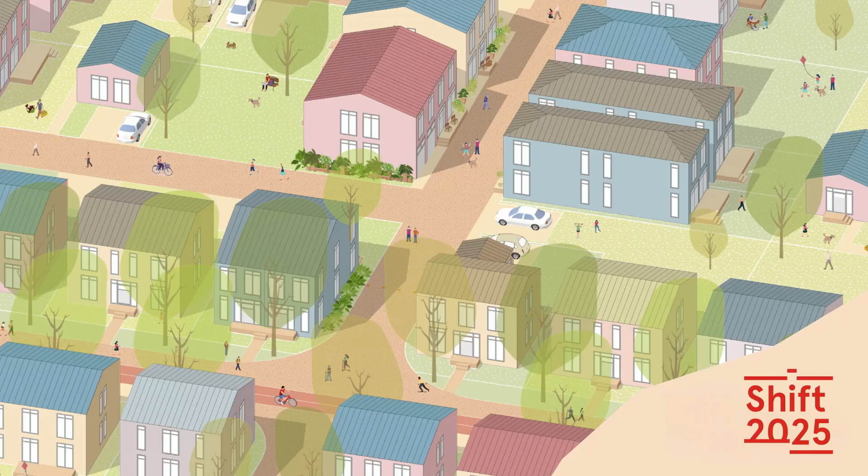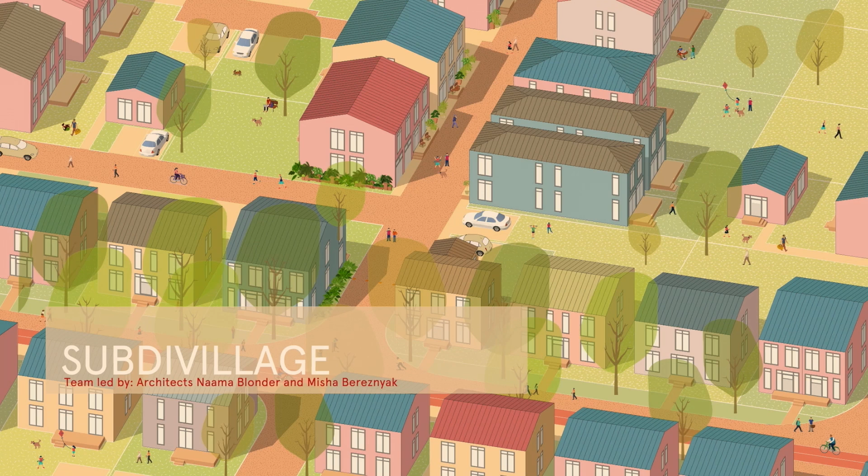So up first, we have Subdivillage by the Smart Density team, led by architects Misha Bereznyak and Naama Blonder. Please join us on stage, Naama. Subdivillage addresses low-density growth by redesigning suburban street networks in order to improve walkability, cycling, and local trips within the realities of low density, car reliance, and limited transit. Without raising costs or density, the concept creates livable communities ready for future transit and growth. Team led by architects Naama Blonder and Misha Bereznyak. Thank you so much.

And this is on? Okay, perfect. And clicker, clicker, clicker. Okay, hi. Thank you so much for having me tonight.

This number, 58%, represents how many single-family houses are built as a percentage among all the new homes we build, almost two-thirds. My company is called Smart Density, and what we advocate for is quite the opposite: much more compact, livable development. I personally live downtown in a condo, don't own a car, bike everywhere. But at some point we realized that people want something else if this is what the stats show. And this is what we build: sprawl, low-rise residential neighborhoods.

Because this is the OAA, we picked some of the best in Ontario, but this is pretty much how it looks like all across North America. And this is how it looks like at the ground. When I talk to people, they say they move to the suburbs because it's kid-friendly and green, which is not so much. Blocked with cars. Cars are very, very dominant.

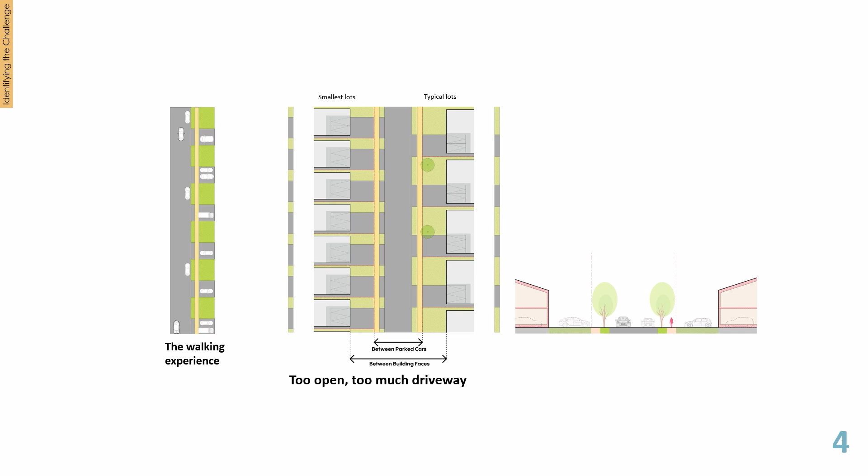And this is how it looks like architecturally. Just look at the street section. Oversized, very, very wide, the walking experience, and even over time, our suburban properties have shrunk because they also need to address density. So the qualities that we had in the original suburbs are no longer delivered in today's suburbs.

And we ask ourselves, can we do better? Because I want to say that even those who like to drive, okay, I don't know how, but some people like to drive, I would say they appreciate walkability. And walkability is this very soft word that architects and urban planners use. And what does it actually mean? So for us, it means that it's pleasant to walk. If you think about it, a lot of our built environments are actually not that pleasant to walk.

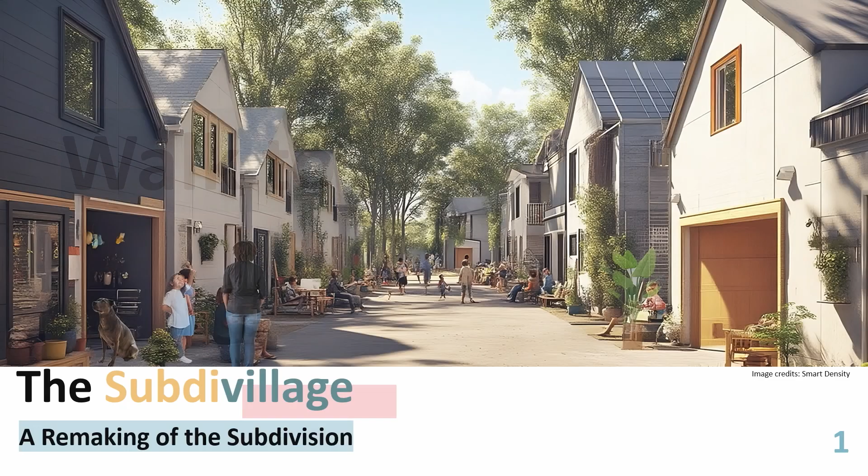With that, we came up with the concept of Subdivillage, that is basically proposing new street typologies. Wait, I'll get to this here.

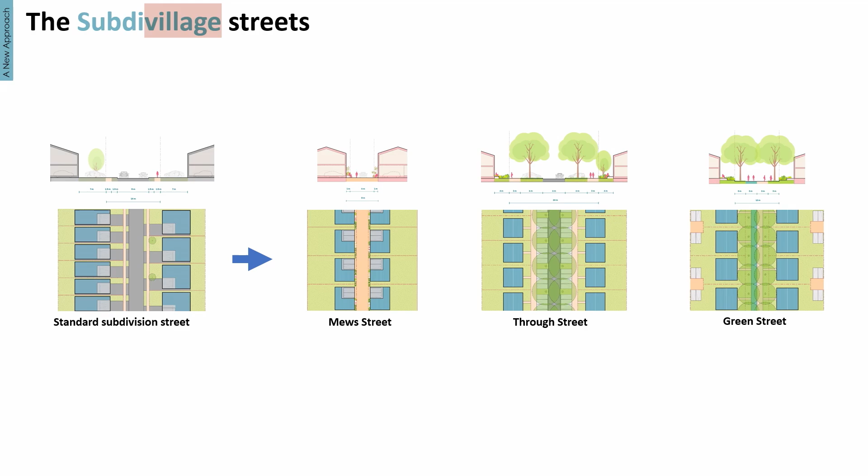We want to offer a menu of new streets. Yes, we will have the regular vehicle street, but we will also have streets that are more car-light or completely car-free in this new neighborhood design. And this is how it would look like. And if you think about it, even what we call the green street doesn't exist in today's suburbs. So can we deliver this new quality?

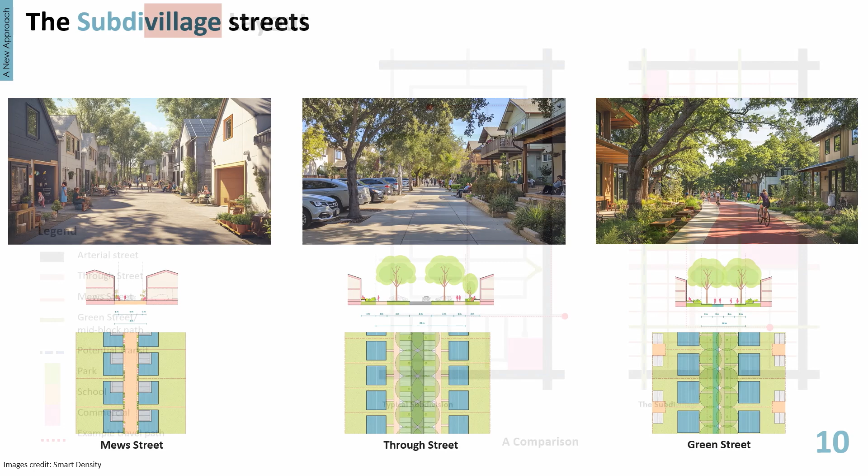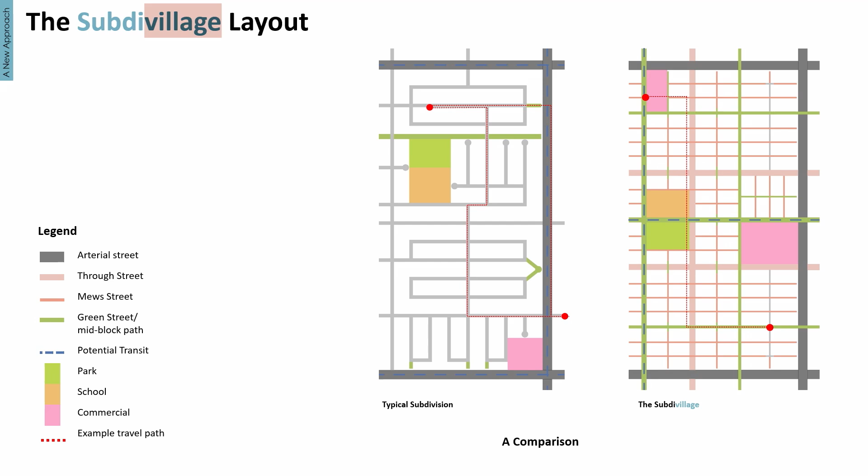Here's a comparison of how our typical suburban layout looks today, and our proposal in comparison, a way more efficient use of land, a simple grid that would utilize a better outcome. Because what we want to see here is that this is not the new urbanism type where you access this street and park your car in the garage, but we believe that design can shape behavior. These streets tell you to slow down. And yes, the streets are also very short, so you don't have to drive very slowly for too long.

So what you would see here, again, the kind of orangey is the Mews street, where it's car-light, and where you can see the little cyclist, it's completely car-free.

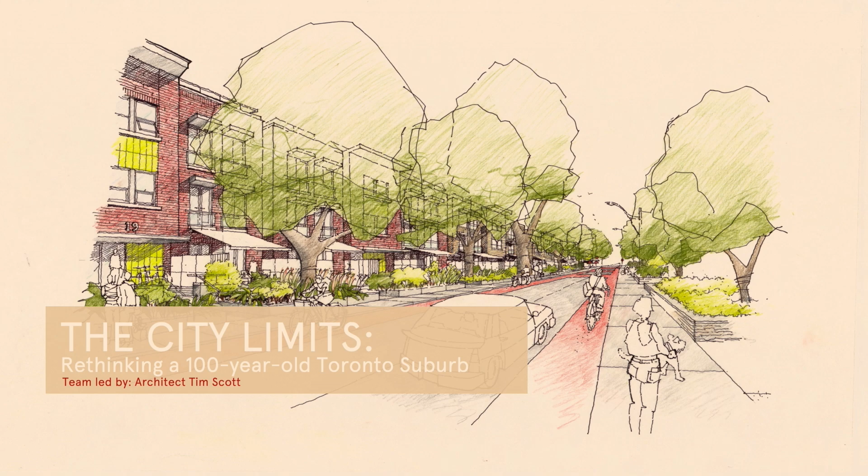The second project is City Limits, rethinking a 100-year-old Toronto suburb, with team lead Tim Scott accepting the award. Please come up, Tim. City Limits, rethinking a 100-year-old Toronto suburb, envisions a sustainable future by integrating climate-focused design, quadrupling residential density, reclaiming streets as public spaces, and creating human-scaled, connected neighborhoods with carbon net zero strategies and cohesive urban living. Team led by architect Tim Scott.

I'm going to read this so that I can blast through it. Thank you, Lara. I stepped back from full-time work in 2022, which has given me time to roam around. But I soon realized I was going to end up on the curb, shaking my fist at the parade of SUVs filling our streets. So I went back inside to do something more constructive.

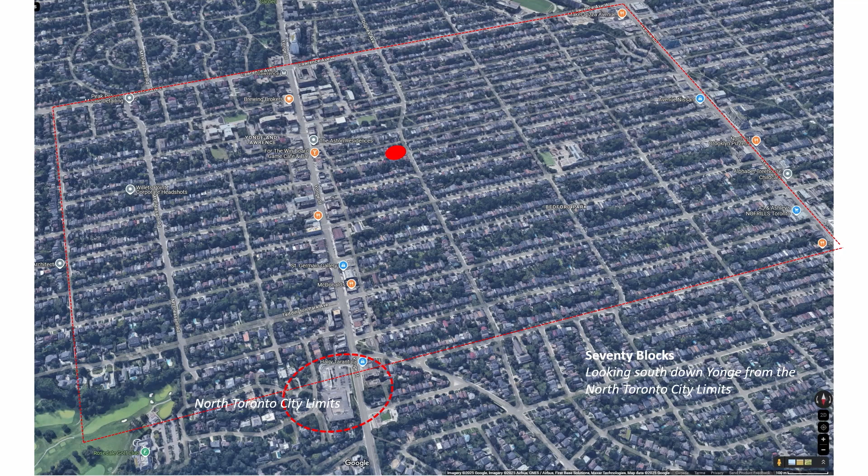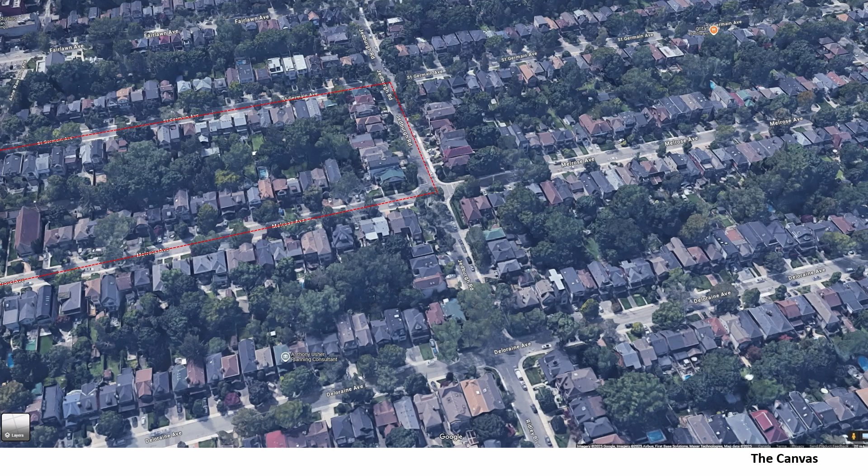Which has been to reimagine what our 100-year-old neighborhood might be like if it were to be a place we'd like to stay. My neighborhood is comprised of 70 nearly identical blocks straddling the primary transit corridor of Yonge Street, between Lawrence to the south and the old North Toronto City Limits site. It's a monoculture of modest single-family homes in single and semi-detached format, typical of many neighborhoods across Toronto and other cities in southern Ontario.

And like all those neighborhoods, it's being rebuilt lot by lot. The new single-family houses are, like the homes they're replacing, all the same, with the exception that they are more than twice the size while accommodating, at most, the same number of people.

This time around, the amenities are all private. The garage has moved to the front of the house, displacing the porch. The front yard landscaping has been largely replaced by paved parking pads. This curious distortion of the status quo is being realized by a development industry who knows its market is fearful of change, unless the change is to make things bigger.

The scale of the new builds, plus the recent changes to the zoning bylaw allowing for laneway suites and 3 and 4 plexes without parking requirements as of right, suits my project perfectly. My objective is to quadruple the residential density within the general form and character of the existing neighborhood for all the pressing reasons: the need for housing, the need for the missing middle, the need for consolidated neighborhoods that are not car dependent.

So I designed a simple 3-story threeplex in single and double lot formats, along with the laneway pavilion, to be comfortably scaled and gracious. Remember, I'm doing all of this to make a place where we'd like to stay.

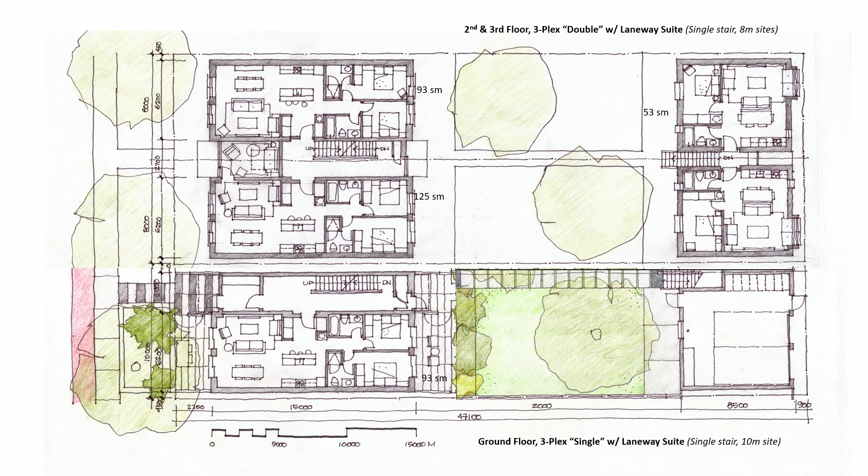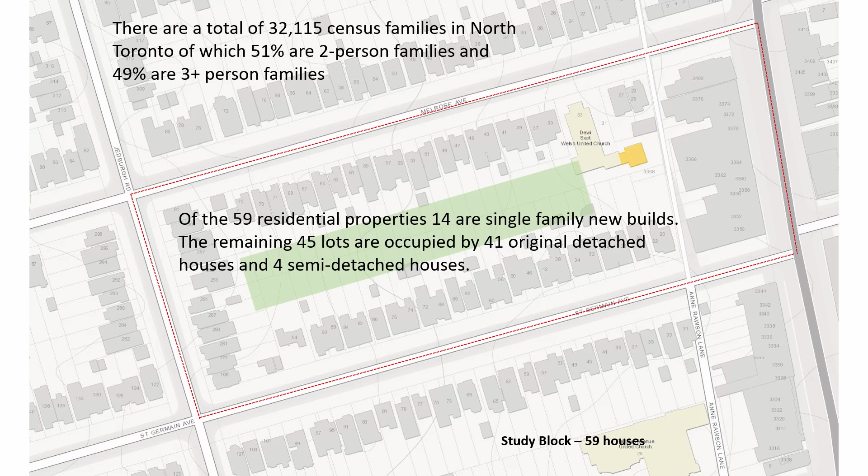Next, I chose a study block with a depth of 100 meters, typical to the neighborhood, providing sufficient room to add an east-west public lane. I replaced several properties with surface parking to accommodate the cars currently parked out on the adjacent streets. Mixed-use development will be allowed in corner lots.

This proposed development will happen organically, lot by lot, in the same way it's currently being rebuilt. As a test, this site plan replaces the 14 existing new builds with 3 and 4 plexes and a number of associated laneway units, increasing the existing 59 homes by 2.5 times.

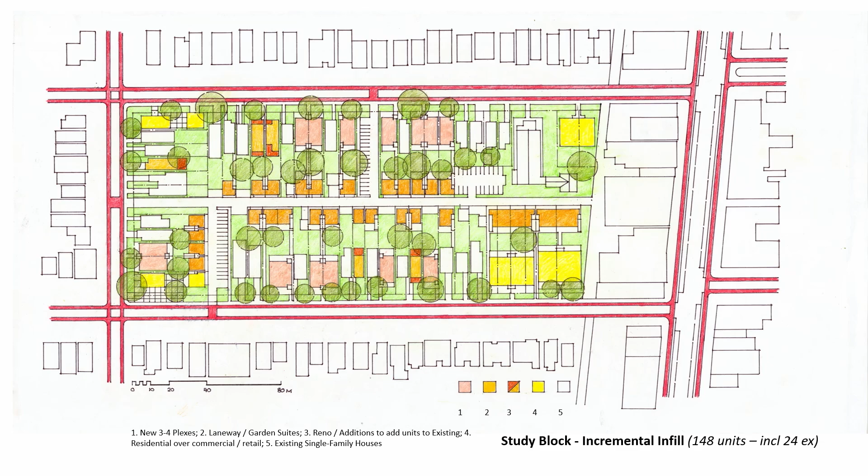And to reiterate, it's of equal importance to me that the streets and front yards are decolonized of cars to allow provision for pedestrian and cycling mobility while reestablishing a landscape streetscape. That's in good part because I also want to live in a human-scaled and civil community.

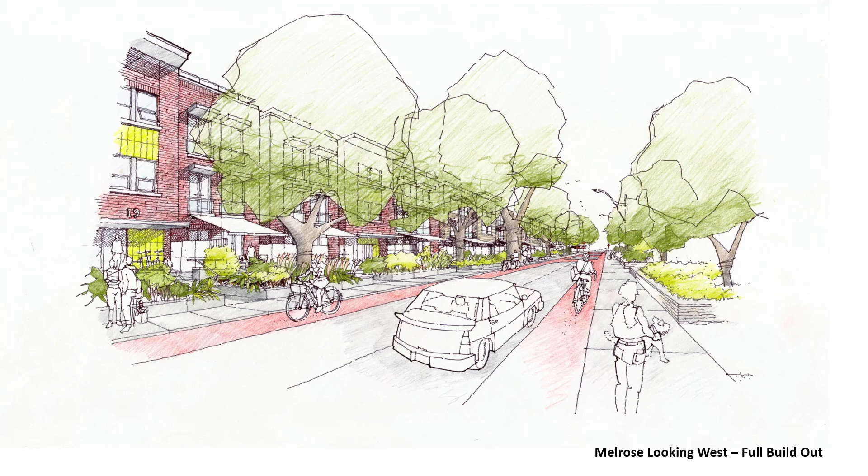I'm not preoccupied by what the new multi-unit residential buildings might look like. I hope lots of architects will be involved. I do care how they're made, which is to be designed to meet carbon net zero emissions and last 200 years. So who's going to take this on, make this happen, or even be interested?

You'll have to look for my full submission to find out how that all works out.

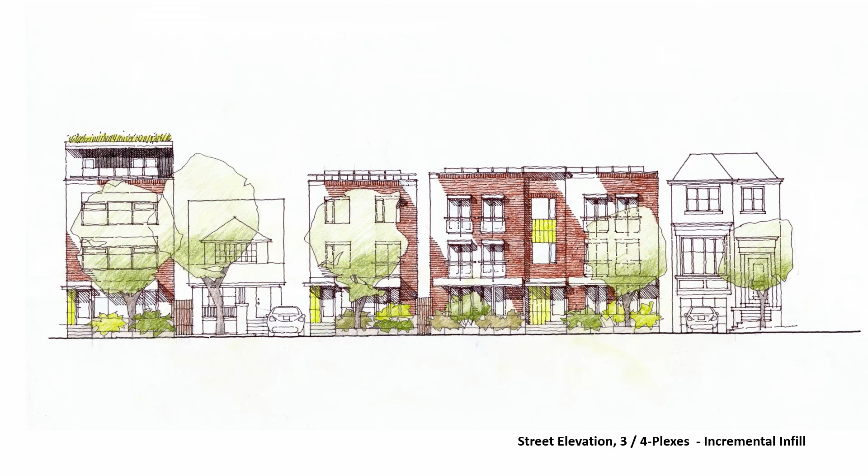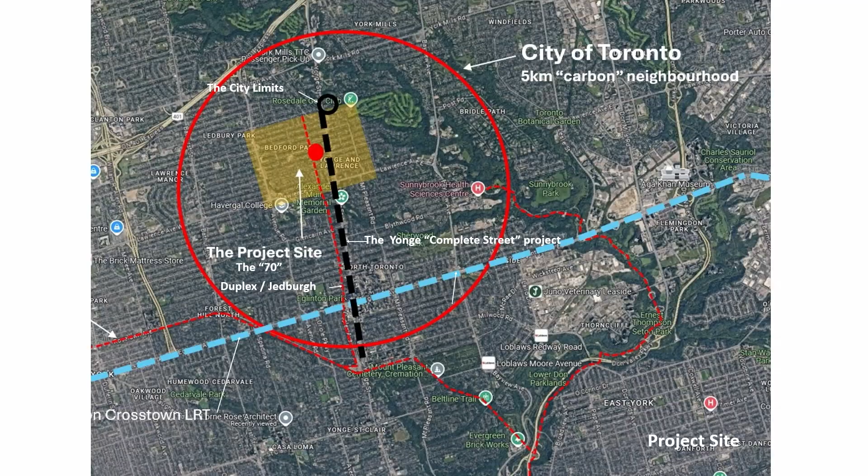I began this project fascinated by the City of Toronto's carbon emissions website, which implores Torontonians to make 75% of their local trips up to 5 kilometers by means other than car if the city is to meet its carbon reduction targets. I find the idea that we all share an obligation to the health of an abstract 5-kilometer neighborhood very compelling. It has directly informed most of what I've done.

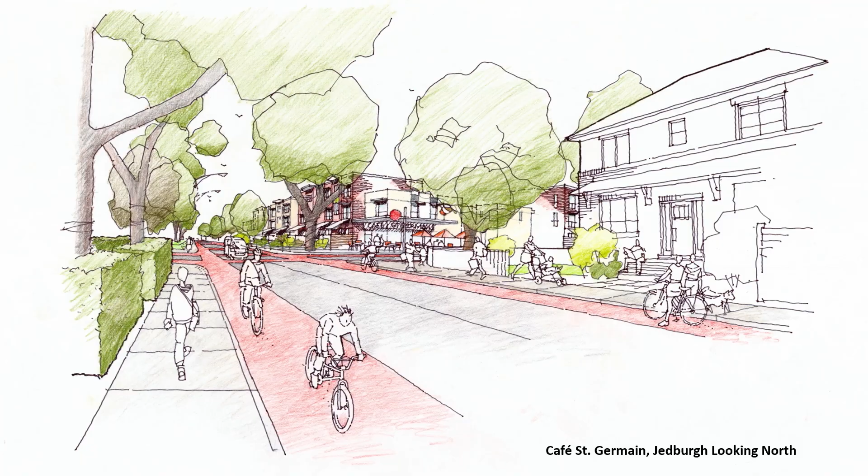Okay, let's cross Jedburgh to the Corner Cafe. Here, we'll be reminded of how important having a variety of third places is to a community. Without them, there's no place for neighbors to discuss the issues of the day, let alone plan a revolution. Thank you.

The third project is called Swansea Park, a development concept for the former Swansea Mews. Accepting the award is team lead and architect David Peterson, along with Avery Peterson and Eunice Leung.

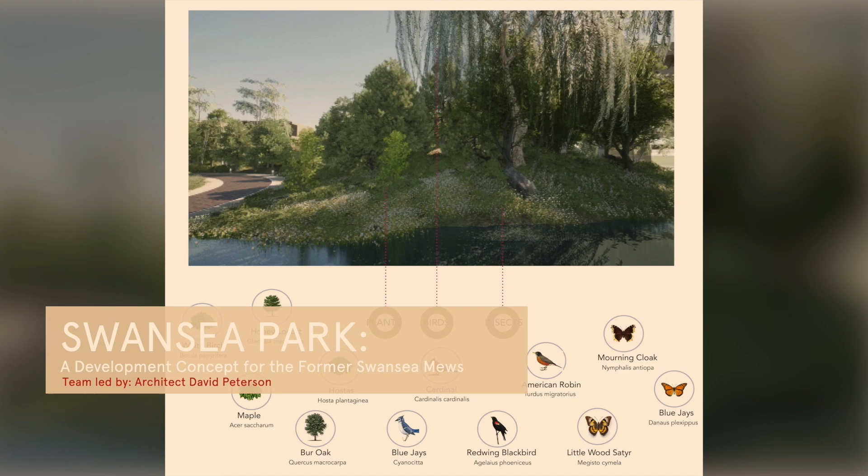Swansea Park, a development concept for the former Swansea Mews, imagines blending nature and urban living through a central naturalized park, doubling housing density with modular mid-rise buildings, and fostering biodiversity alongside vibrant public spaces for community engagement. Team led by architect David Peterson.

So to begin with, I'll take you through our site location. So that blue line that's kind of faint to your view is our site. It's a Toronto Community Housing Authority site. It's home to 154 rent-geared to income units. The site is kind of slated for demolition because there's been a structural failure.

The site belongs to this neighborhood, Swansea, that has been called by the City of Toronto a significant ecological kind of area. And you can see why. Off to the left is the Humber River Marshes, which is west of the site, and it's home to all kinds of biodiversity. And similarly is true in High Park off to the east. You can kind of see the city beyond.

And throughout the neighborhood, what we find is the topography is not made flat. There's all these kinds of ravines that run north-south through the lot, or through the neighborhood, that are also helping increase biodiversity.

The south of the site is quite a bit different. We see regional roads, regional rail lines, and densities that belong to more like 5 and 6 times density, where the rest of the neighborhood is primarily like 1 times density and virtually low rise. So that's the context.

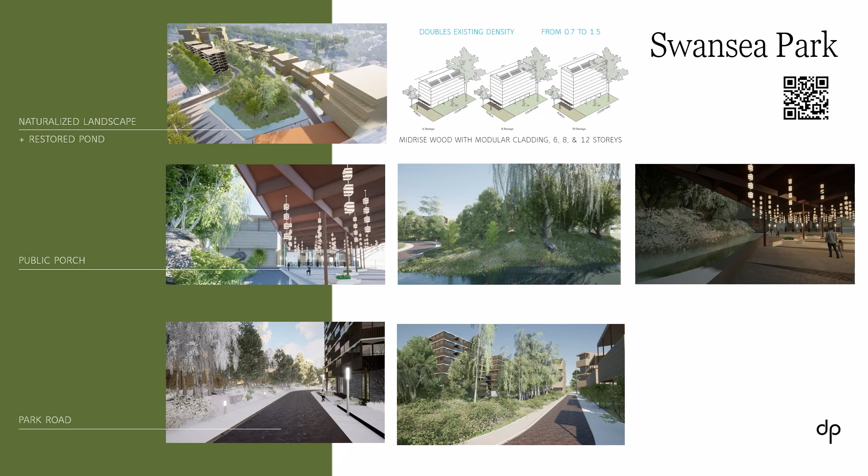So part of what we did as an initial idea was to restore the pond and create this central landscape that would encourage biodiversity. We wrapped the buildings around this crescent-shaped road, thinking of the buildings as modular.

At the edge of the development is the arterial road where we create a public porch that can host all kinds of amenities and becomes a threshold to a pedestrian thoroughfare in this crescent road. Vehicles have access to the buildings, but they're intended to be a secondary means for moving through the site, a single lane, one-way road.

Not feasible—this is really what I want to talk about. All these great ideas, competitions we have, architects congratulating themselves, are really worth discussing. But then we get frustrated when we gather together as architects and talk about other parts of the world where we see these things happening, and we're left to ask, why doesn't it happen here often enough?

Through my housing research, I've come up with some answers. Part of what we see elsewhere is not that they're better designers than we are—I think we can congratulate ourselves on being innovative that way—but they're also innovating in construction, innovating in governance, how they procure projects, how they award projects, and importantly, I think they have more diversity of financial models for making housing.

So this is part of, I think, a look at how we can become feasible with some things. The top left of the screen is the City of Toronto's initial development plan for the project site. They're proposing something that's more like 5 to 6 times density, and you can see the numbers of units they're looking at—154 affordable units is what they had to replace.

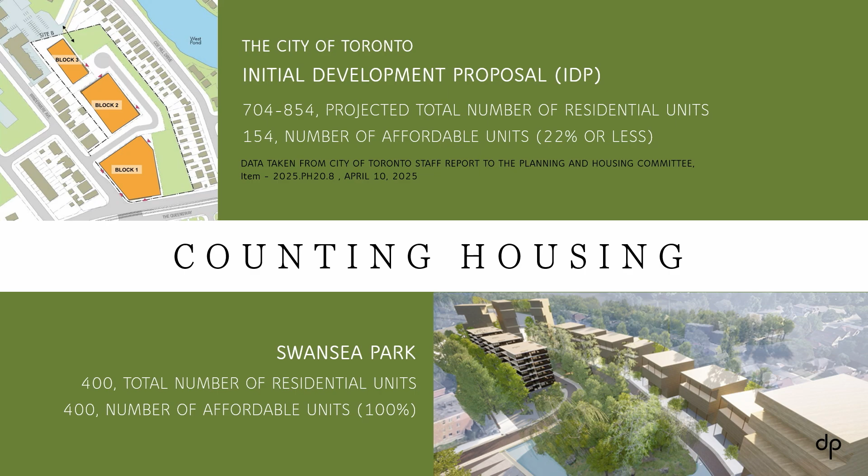We're looking at something that's still trying to think about socioeconomic diversity by accommodating both low-income and middle-income units, through a different financial model—one that takes a long-term approach to development, rather than where investment returns happen quickly. It's long-term thinking, an idea that's not new, but an equity co-op that allows for a larger pool of investors.

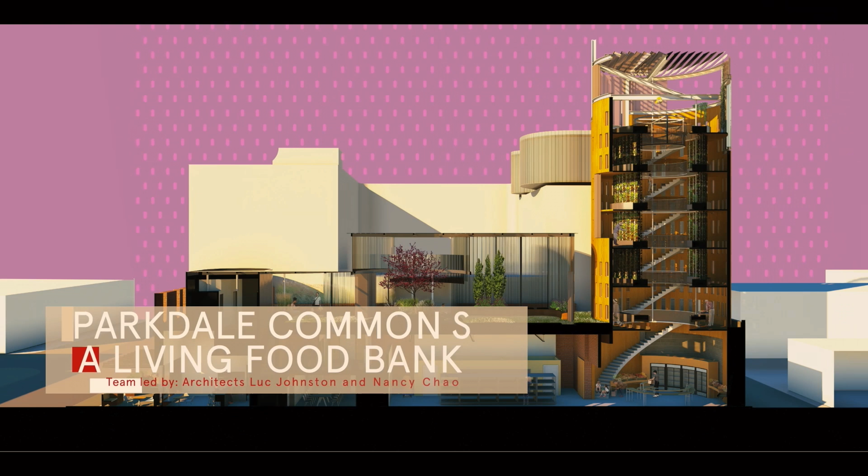Parkdale Commons, a living food bank, transforms Toronto's Parkdale Community Food Bank into an adaptive space, fostering resilience, food security, and sustainable connections through thoughtful architecture, evolving with diverse neighborhood needs and strengthening community empowerment. Team led by architects Luc Johnston and Nancy Chao.

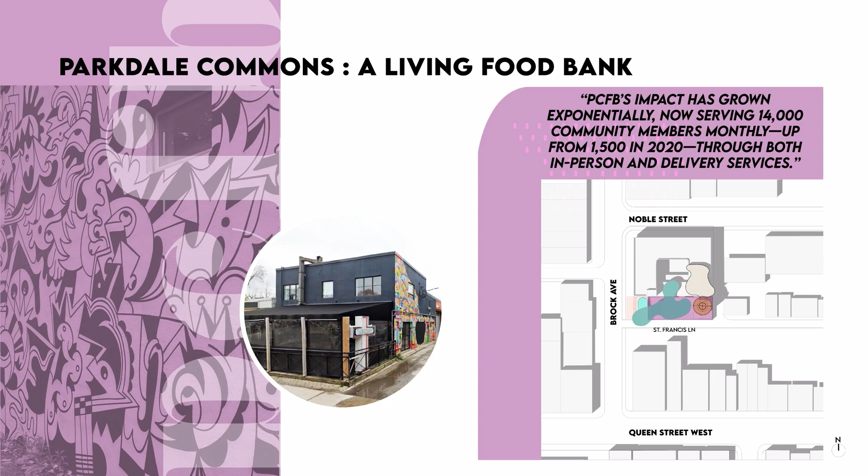We started work with the Parkdale Food Bank last year when they purchased their new house building on 5 Brock in the Parkdale community. Both of us lived in Parkdale, and we were well aware of some of the issues they were facing: gentrification, wage disparity, high rent, and of course food security. It was a significant purchase for the Parkdale Food Bank, because they'd been operating out of two different locations and trying to run things.

Like many food banks across Canada, we quickly realized they were doubling at an exponential rate—more clients—and when they got this project, we started to think, what happens in 5, 10, 20 years? Our meetings with Parkdale really opened our eyes to how an operation like this works. I think we realized that while we donate our food and they distribute it, a lot of what they do is take in money and purchase food.

This leaves them vulnerable to global impacts affecting food prices and local impacts too, such as bread price fixing. Other issues: they had long lineups in inclement weather, no public washrooms, a lack of kids areas, and a lack of space for community outreach.

What we realize is that the food bank isn't just about this exchange of food, although it is, but it is also a community hub or a commons for people to gather, socialize, and organize.

So we approached this project and this competition to free ourselves from an economic restraint. We said, what could we do? I think what we did is we crafted these kind of adaptive reuse interventions that look to aid both the food bank and of course the community at large.

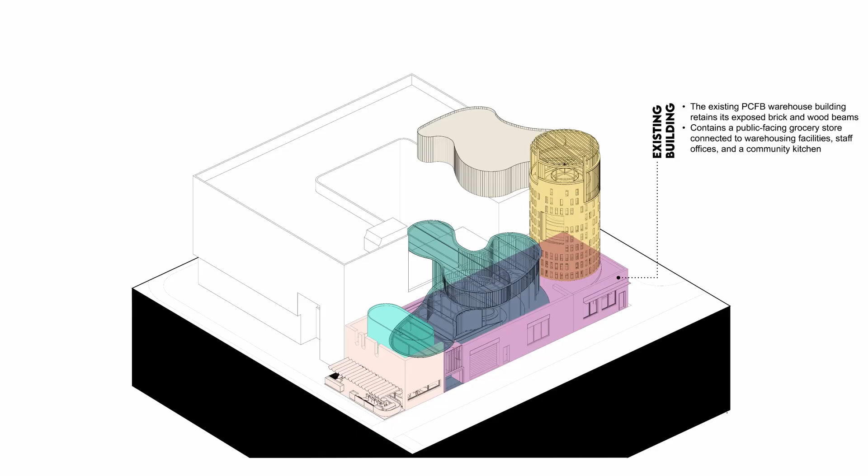So what you see here is the existing building, a turn-of-the-century warehouse. This houses what they call the store, their warehouse and offices. At the front, we envisioned a restaurant. It's currently a restaurant right now, but we thought of it as an incubator space for up-and-coming chefs, featuring local produce.

11 Brock Community House, directly north of them, we looked at having a symbiotic relationship between the building systems, mechanical systems, but also the inhabitants of those two buildings, so expanding their communal space. On the second floor of the property, we quite simply put in a washroom and shower that's available 24/7.

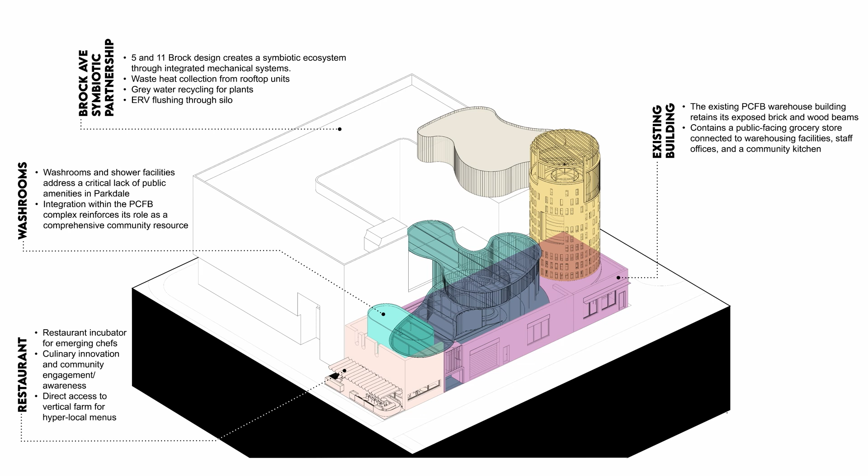Adjacent to that, we thought of a conservatory, so community gardens, a gathering space that could also act as shelter for inclement weather. And finally, we have the silo, which we thought of as a CLT tower, a kind of beacon in the community dedicated for food production.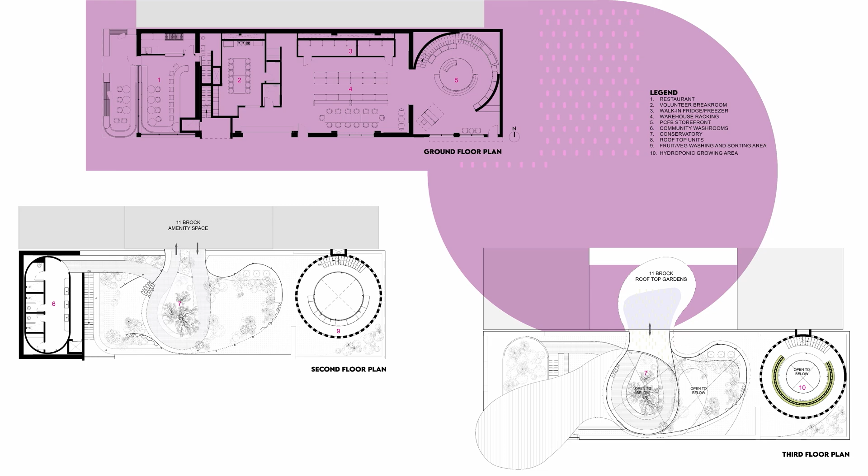To the left of that is the shower washrooms building, and we have our vertical greenhouse on the right-hand side. The last plan in the corner shows how our building is starting to extend to our neighbors. In this section you can see our multi-level garden, and on that second level we're starting to expand our footprint towards our neighbor, creating a new interconnected communal space.

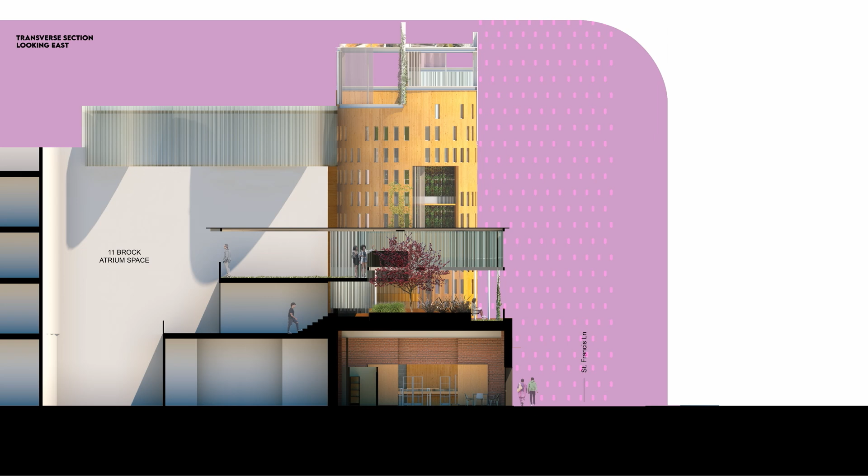We've also enclosed 11 Brock's mechanical room, capturing and recycling waste heat to support our greenhouse. This section illustrates that same idea about energy heat recovery, speaking about sustainability and resource efficiency.

Our section through the whole building looking north: we had an idea that the conservatory and the silos would have operable walls to open up the space. The conservatory also doubles as a shelter, since clients usually wait in line outside, so this would help protect them from inclement weather conditions.

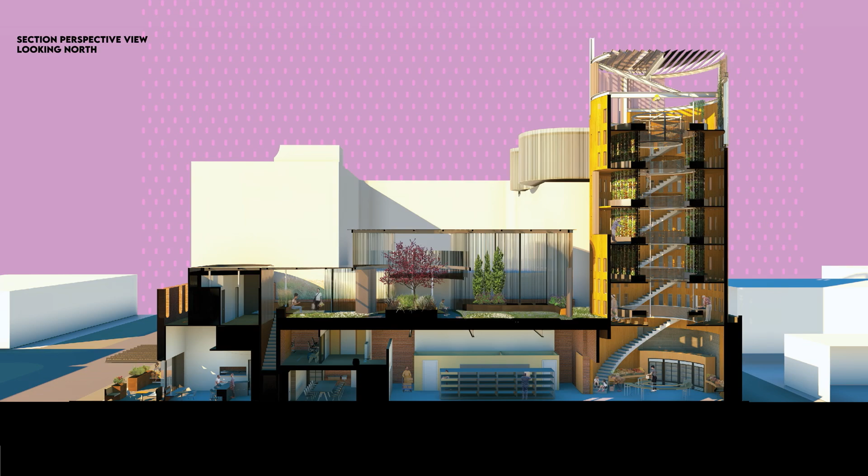You can also see how that silo connects to the stores below, bringing together both food distribution and production all in one location. Finally, our last slide shows that vertical greenhouse is really a beacon to the neighborhood.

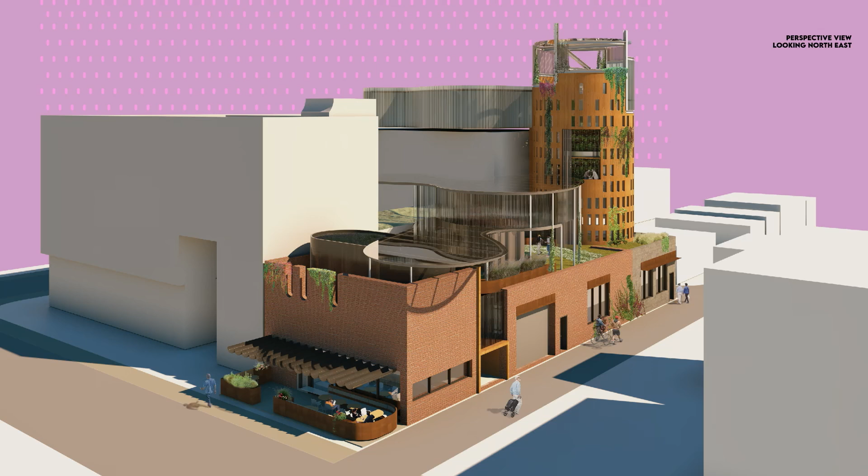Our design was really inspired by old concrete silos we had visited many years ago, but we wanted to modernize it and use more sustainable features and materials. The conservatory and washrooms, we wanted to contrast against the existing buildings, so they're a lot more amorphous and inclusive in their shape and materiality.

So our project really isn't about reforming food insecurity in Toronto, but it's a response, basically creating infrastructure that can withstand and adapt to Parkdale's evolving community dynamics.

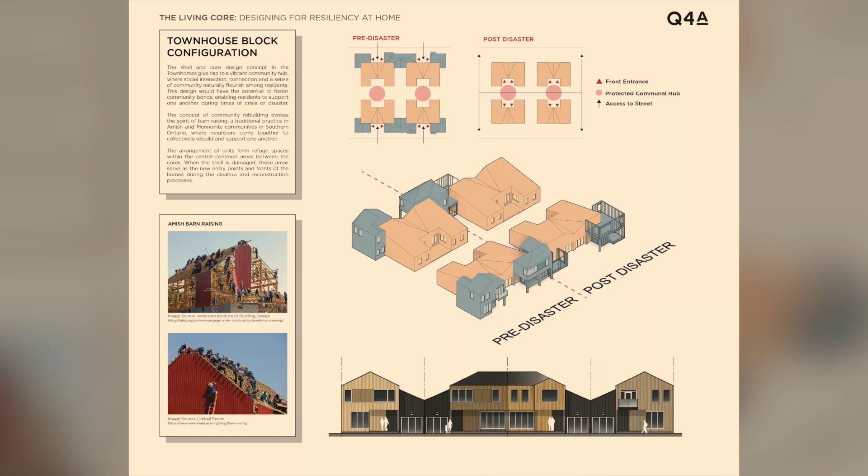The Living Core, Designing for Resiliency at Home, which reimagines housing with a tornado-resilient design, integrating cost-effective rebuilding and essential functions to protect small-town Ontario's economic and cultural fabric while fostering adaptable, secure, and sustainable living spaces. Team led by architect David DiGiuseppe.

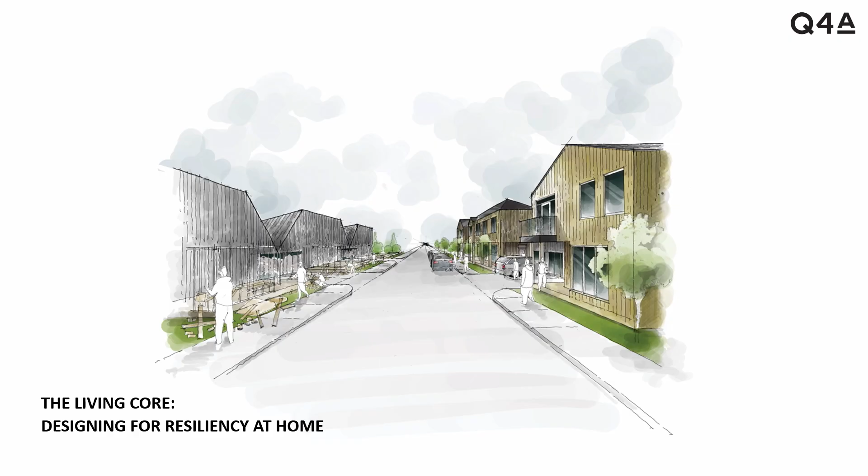Hi everyone, my name is David DiGiuseppe. I'm an associate at Q4 Architects in Toronto, and we like to say that we specialize in residential design, but also small commercial and institutional buildings that make our communities great places to live.

So our project, The Living Core, Designing for Resiliency at Home—the premise is all in the name, and we feel that the Living Core embodies the key elements of SHIFT, which is building resiliency in the face of radical change. So we've designed our project both for building resiliency against weather-related changes, but also building resiliency into the fabric of our communities.

This becomes all the more important in a housing crisis, where keeping families in homes and communities for generations lessens the pressure on our major urban centers through potential displacement.

So we wanted to use the SHIFT Challenge to change the focus of our discussion on housing challenges in Ontario, particularly when we consider climate change and shortfalls in the residential sector. The conversation invariably is about cities, particularly Toronto or Ottawa. So we challenge this notion through our proposal to look at the smaller towns and communities that define the architecture and the whimsical vernacular of our province.

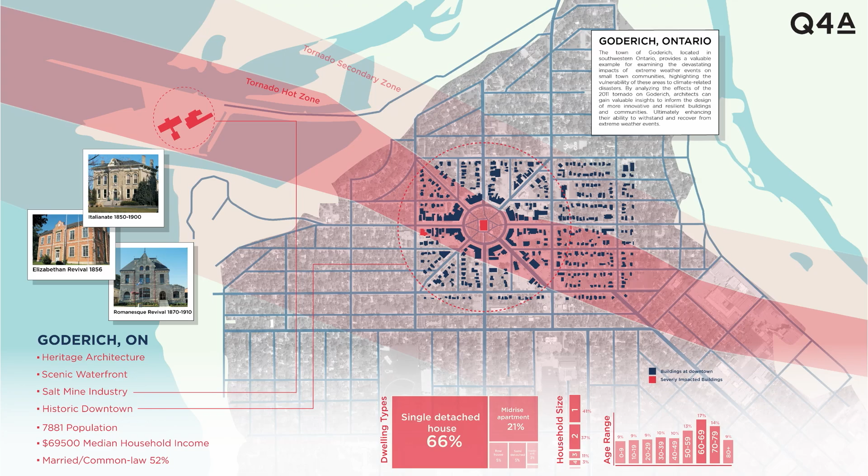You can see that over 60% of the homes in Goderich are single-family detached, and 21% are small or mid-rise apartments. So this needed to be studied in order to really look into the essence or the vernacular of the community, so that our solution could actually reflect its true nature.

In addition, Goderich reinforced the idea that our picturesque towns, which are often waterfront communities in Ontario, are particularly in danger of climate-related events.

So our idea is quite simple: it's to divide the house into two defining elements—the core, which is a fortified and protected engine of the home, a solid bunker-like structure that provides protection for high-cost possessions, appliances, and building systems, and then the shell, which provides additional living and individual spaces, but in the context of a disaster, an acceptable loss.

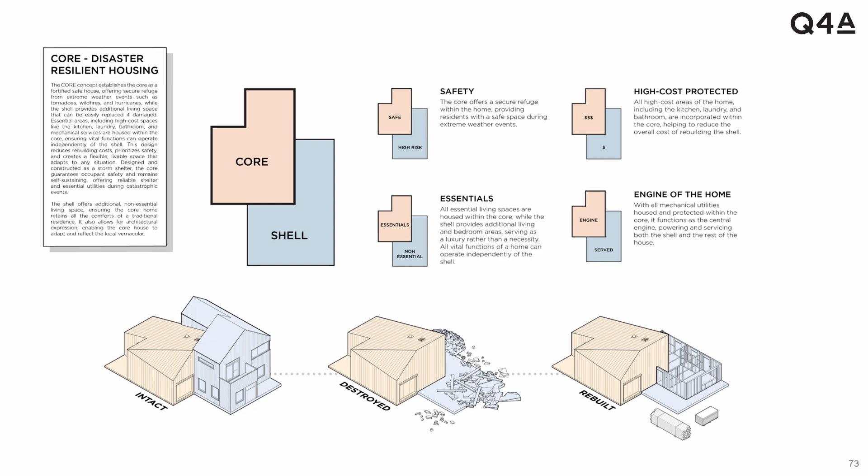The core is rigid and heavy, and could be mass-produced and replicable. It centralizes the house's services and provides points of connection for the shell. The shell, on the other hand, is lightweight, less cost-intensive, wood-framed, and easily modified or customized to capture the vernacular character of the place it's built.

The core allows for safe sheltering in place. While some of your property may be damaged, there's still a livable platform for rebuilding. So we don't lose sight of what constitutes a home, and all of the expected amenities of a detached typology are there, divided into essential and non-essential spaces. During normal conditions, the integration of these two elements is seamless.

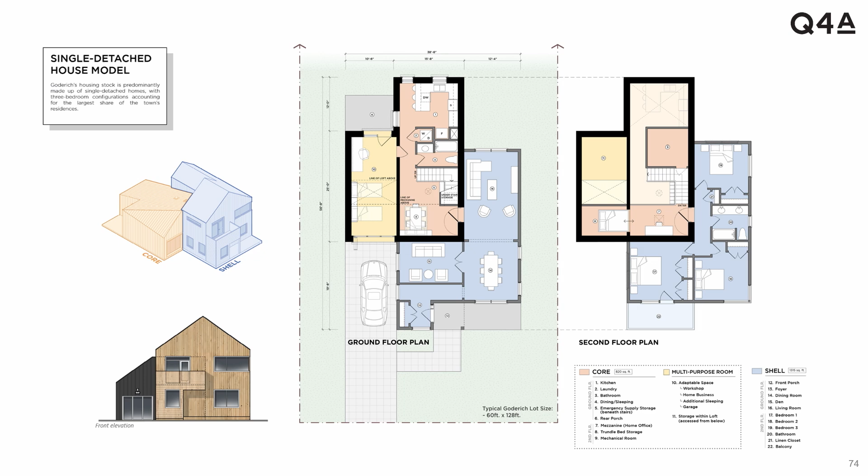So in the event of an emergency, we have to reconfigure and create space by putting our possessions away and protect the assets of the home that are key to rebuilding. In a suburban or rural context such as this, that often is a car. You can see more about the proposal in the presentation booklet and on the website.

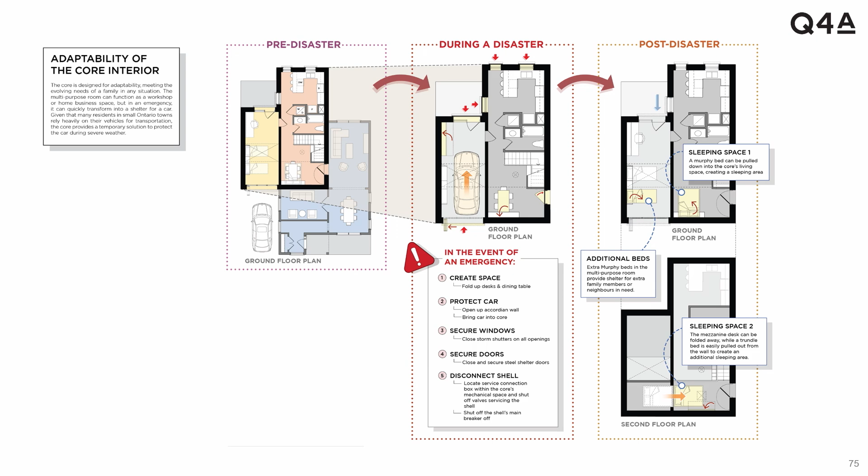We also looked at more multifamily typologies, in this case townhomes, which form a lot of the housing stock in these communities in Ontario. While studying the collective form of the core and shell townhouse, we realized that in the event of disaster, the core actually switches its orientation and creates a more protective environment at the back of the house for rebuilding and connecting with the neighborhood.

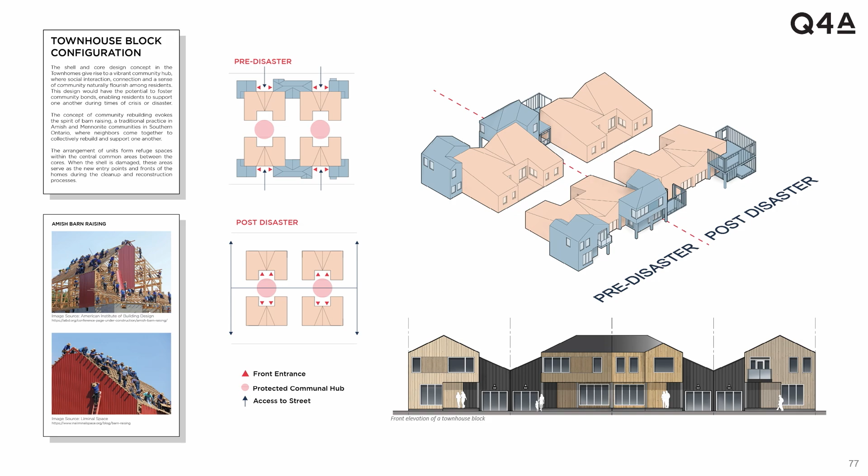And this called to mind the evocative image of an Amish barn raising, which has context in southern Ontario, but also illustrates the power of collective action to respond.

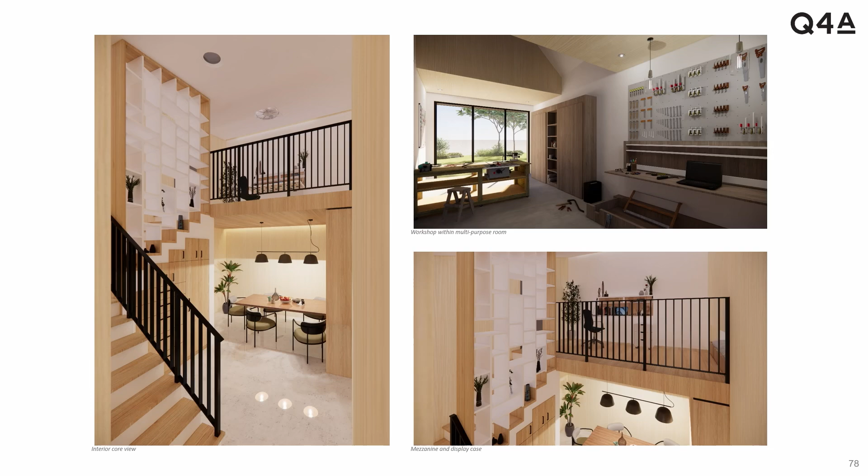So at the end of the day, our proposal for the core house is still a place to live, and we wanted to capture that and present itself as a home—not a case where the inhabitants are always reminded of the potential for a disaster, but that they have a sense of assurance and insurance in that case. Thank you.

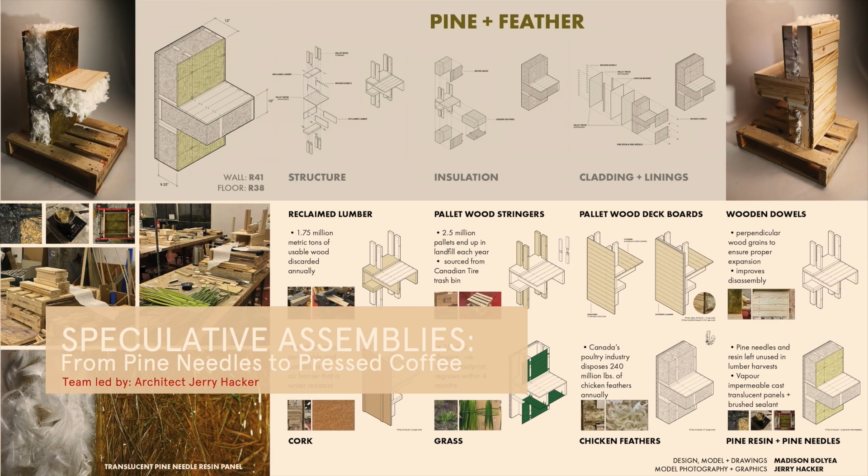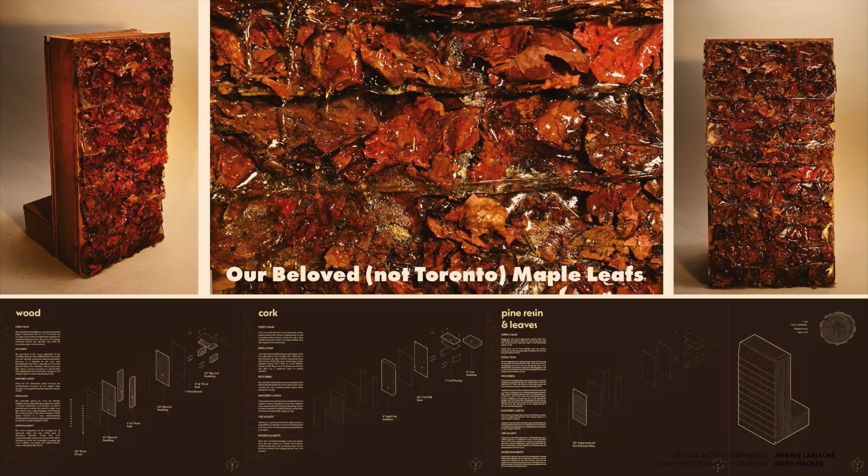Speculative Assemblies, From Pine Needles to Pressed Coffee, conceives a sustainable future by reimagining building practices, eliminating plastics, toxins, and exploitative supply chains through regenerative, biodegradable materials that promote biodiversity, human health, and environmental renewal while addressing urgent climate and ecological emergencies. Team led by architect Jerry Hacker.

Okay, one more. Is everyone ready for one more?

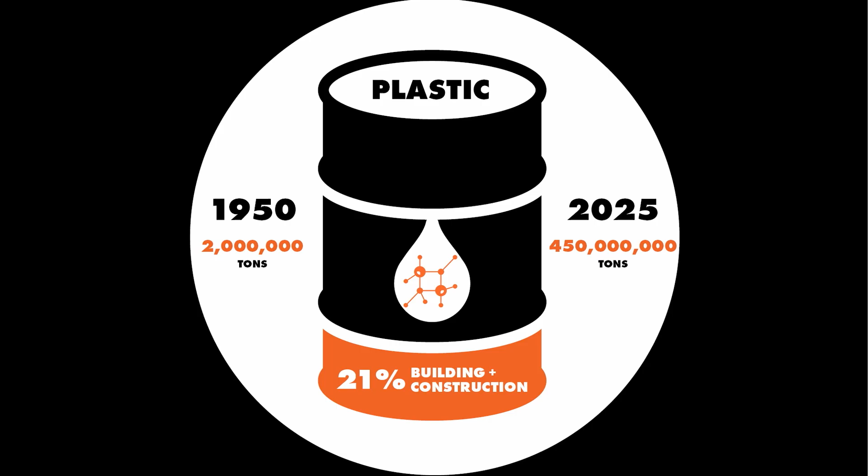Natural building materials have been used for thousands of years by vernacular settlements and indigenous cultures. But following the two world wars, something interesting happened in the chemical processing world. Styrene monomer, a clear liquid byproduct of petrochemical processing, became super important to that industry, and they found a particularly lucrative use for it in plastics. In just 75 short years, plastic has gone from 2 million tons to 450 million tons. And where there's plastic, chemicals of concern come along for the ride.

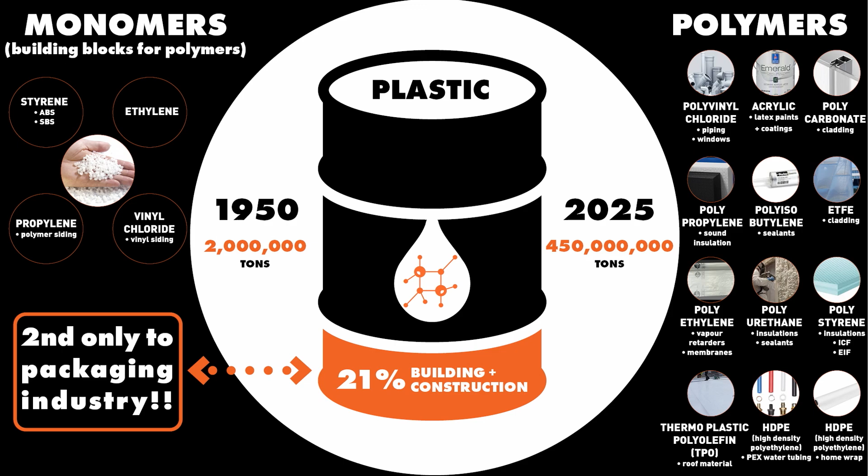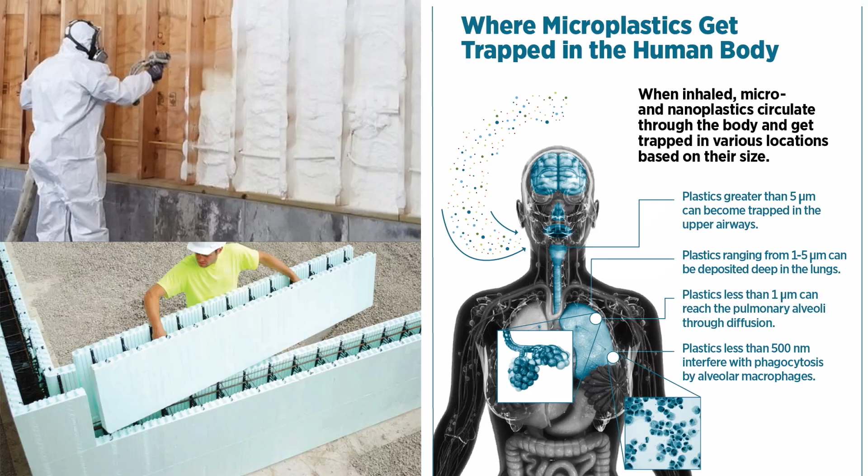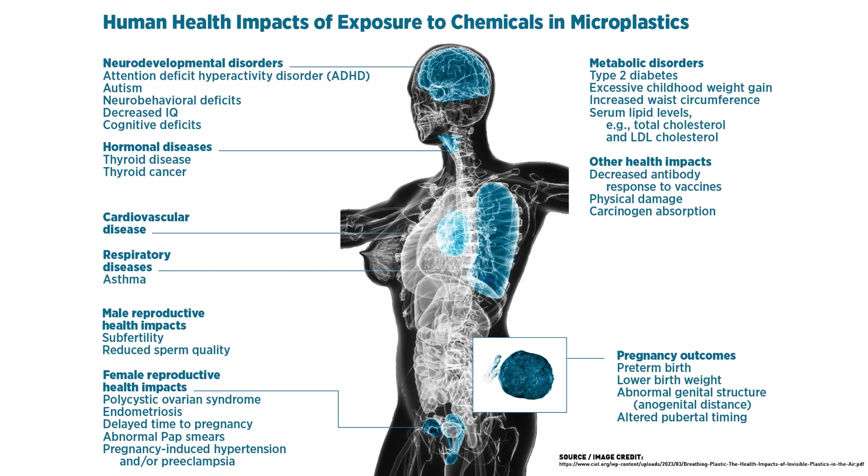The building and construction industry now accounts for 21% of plastic use, second only to packaging, which is kind of crazy. Membranes, cladding, insulations, finishes, adhesives, piping—these now touch nearly every part of North American construction. We drink water that sits all day in plastic piping. We spray plastic into buildings that requires gas masks and full hazmat suits to install. We put plastics next to soil in the ground, all under the guise of sustainable initiatives. And those plastics do not degrade, possibly forever, but instead slowly shed themselves into the environment as microplastics, which have been found in our blood, in the placentas of babies, and even in brain tumors. They pass the blood-brain barrier in our bodies, and they're finding their way into everything.

So this led to the question: what if you could plant a building? What would that really mean? If you had to start thinking about that, what would it mean in terms of the creation of the building? And would the end of that building really be any different from the start? From there, this research into cold weather speculative assemblies was born.

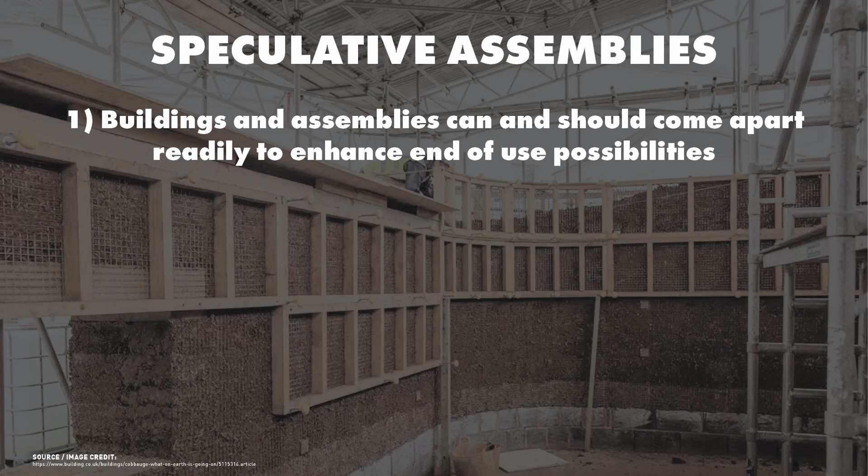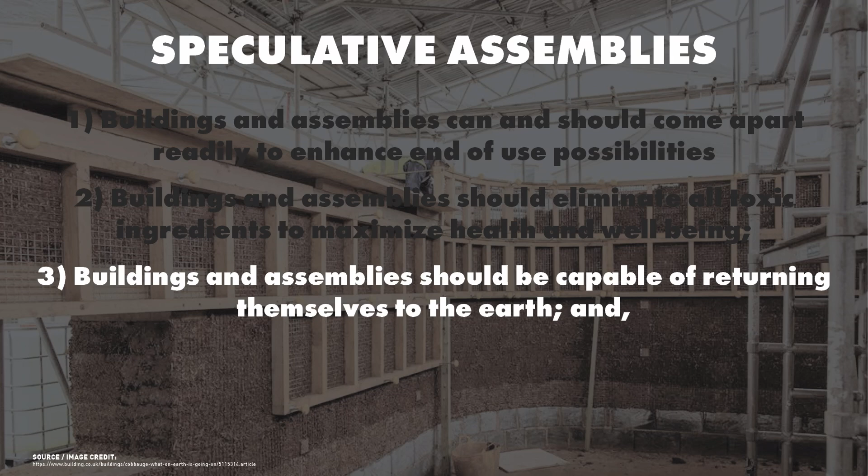It begins by stating that buildings and assemblies should come apart much, much easier than they do now. It mandates that we should stop putting toxic stuff in our buildings. It posits whether it's possible for a contemporary building to fully return itself to the earth. And finally, it places priority on buildings and assemblies being made of regenerative resources, participating more wholly in regenerative cycles.

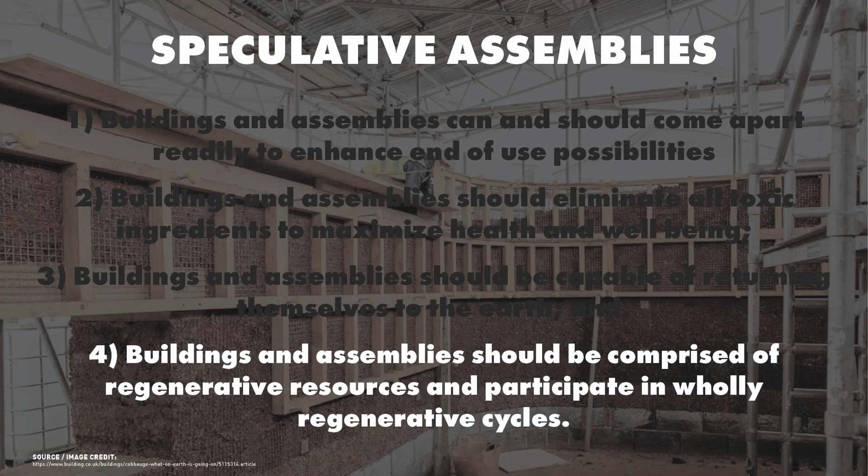The examples undertaken as part of this research: Big Thick Cob is an investigation into thick self-regulating walls of the past, rather than subscribing to the layered wall approach of contemporary construction, where a series of singular materials designed for a singular purpose are stacked and layered together. Cob proposes a thick assembly that's simultaneously the insulation, the cladding, the moisture control, and the aesthetic finish. The assembly breathes and regulates temperature without petrochemically derived membranes, avoiding materials prone to failure at many points in the construction process.

In Cattails, hip waders were donned to harvest a fast-growing regenerative local resource—cattails—transforming it into wall insulation with an R value of 40. From here, a wood stud wall and wood cladding has been redesigned to avoid the use of metal mechanical fasteners, ensuring it will biodegrade into a nutrient-rich compost that can help with the next set of building materials.

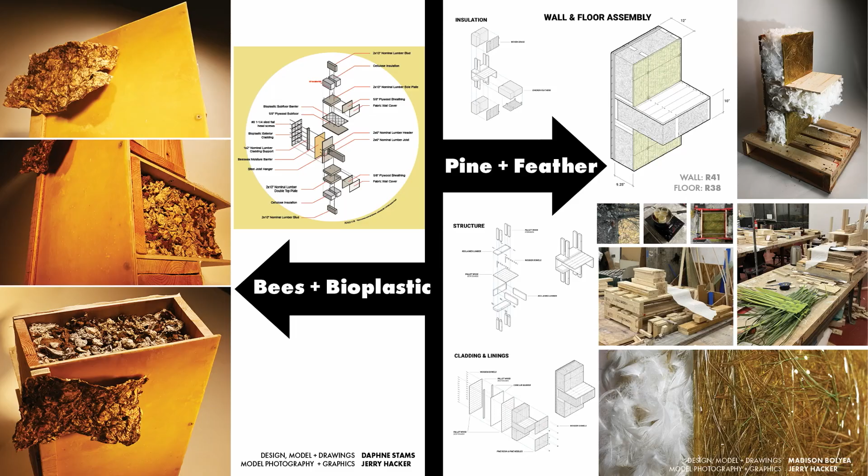Bees and Bioplastic deploys extensive research into beeswax and bioplastics for moisture barriers and exterior cladding. Of particular importance here is the attempt to find naturally occurring alternatives to petrochemically based barriers we're so familiar with—all the SBS membranes, Tyvek, and these kinds of things.

Pine and Feather finds new uses for readily abundant naturally occurring materials such as chicken feathers, oddly enough, a resource we currently dispose of 240 million pounds of a year. Using beeswax and soy wax to neutralize dander and prevent decomposition, it looks for a way to come up with new insulations. Pine needles and pine resin, routinely left unharvested during lumber processing, are used here to create translucent interior wall panels that also act as effective air and vapor retarders.

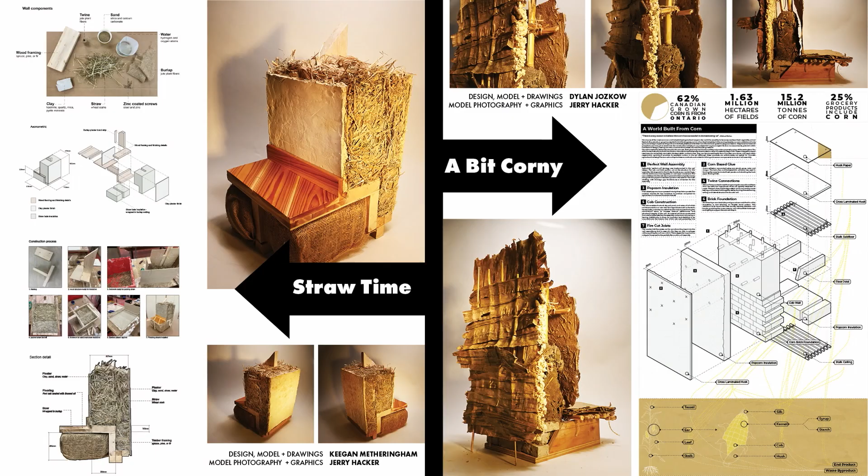Straw bale has been in use for centuries, but it's never quite become mainstream, even though we have so much of it here in Canada. It's abundant but still left to the fringes of the industry, partly because dealing with fire, pests, and moisture are critical things to manage with straw bale. So here we're looking at strategic additives such as clay plasters and other materials to allow these to be used more readily. Obviously there are regulatory issues as well.

A bit corny, this one is fun. It tests the limits of a single material. Corn is arguably the most common and industrialized crop in the world, in everything from the food chain to corn syrup. That means there are abundant excesses from the crop that might be a regenerative resource for the industry. This project deploys an all-corn solution: stalk subfloors, ceilings, popcorn insulation—which is also being researched by a German architect—husk paper, cob wall, and corn-based adhesives.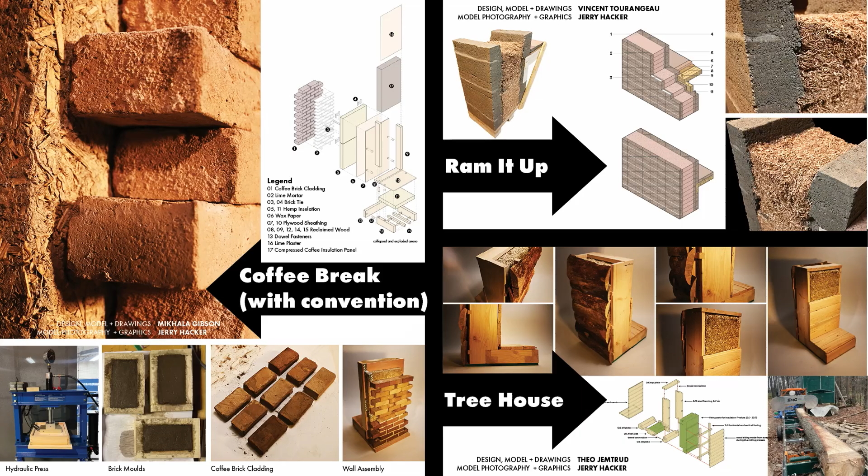Our propensity for morning coffee means there are 6 million tons of coffee waste produced every year worldwide. To explore the potential of this byproduct, clay, coffee, and potato starch were combined to create the raw materials for a coffee-based brick cladding, bound together with a lime-based mortar. Due to its low conductivity values, it was also compressed into panels and used for interior and exterior insulations in this kind of assembly.

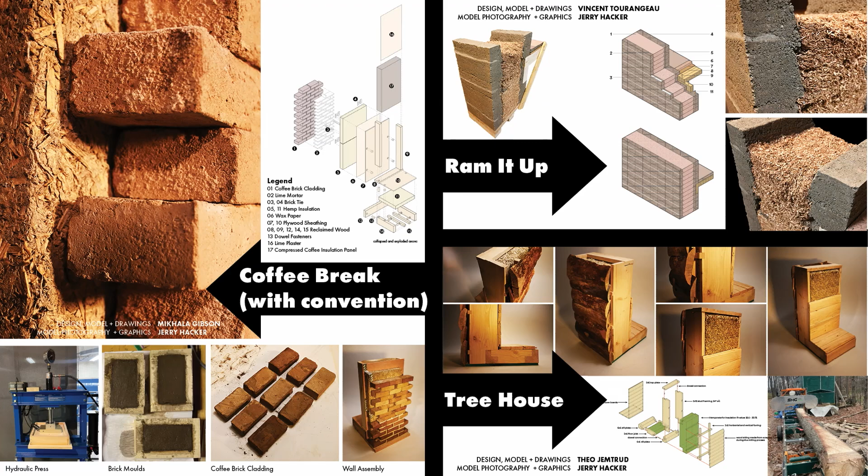And finally, Tree House harvests a single fallen log and strives for an adhesive-free, metal-and-mechanical-fastener-free insulated assembly with reversible joints and all-wood finishes, including unstripped bark cladding.

So thank you very much, and let's go Jets. Little Manitoba plug there. Okay. Thank you, Jerry. Go Jets. I'm not even a hockey fan.